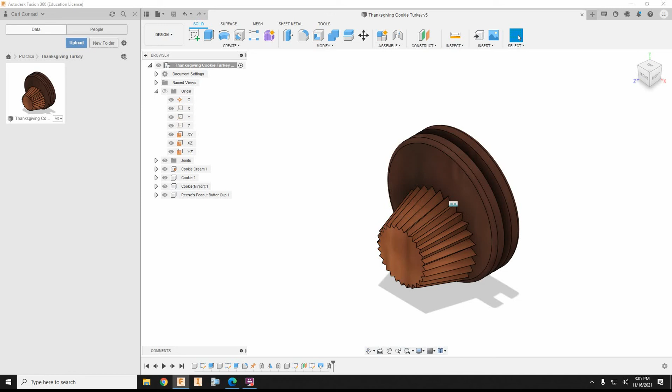Okay, for the Hershey Kiss, of course I want to have my base activated, my assembly file activated, and under Assemble, do New Component again, select Hershey Kiss, and go ahead and say OK.

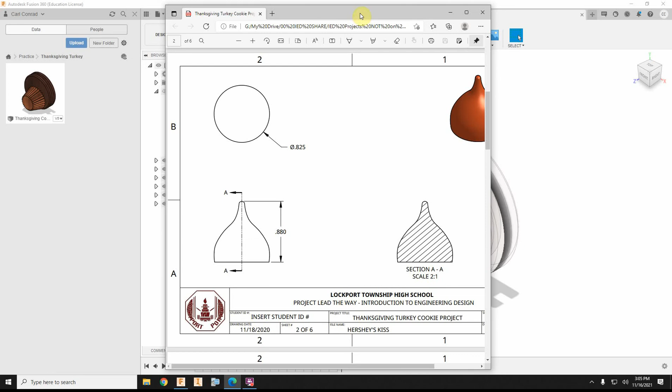If we take a look at what we're going to need to do here, we're going to need to revolve it. We don't have all the dimensions, so we're just going to play around with the spline tool or arc tools and try to come close to that shape. We know the diameter is 0.825 inches, and we know the height. So we're just going to try to come close to that. We won't have all the dimensions, but for the purpose of what we're doing, that's going to be fine.

When I go to sketch this time, I want to make sure I get the origin plane that's right in the middle. I'm going to start off by drawing a center line.

I'm not seeing that edge there, so before I start drawing I need to do a project. I want to project that edge, and I want to project the edge of the cookie and the very top edge of the Reese's cup. That gives me some geometry for where those points are meeting.

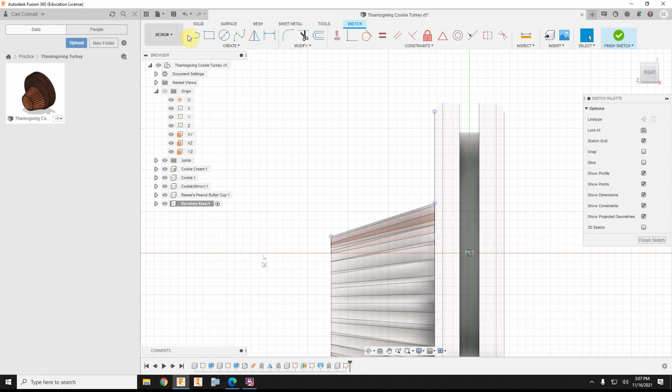Now I'll sketch a center line, because I'm going to want to revolve around this, and the height of the Hershey Kiss is 0.88.

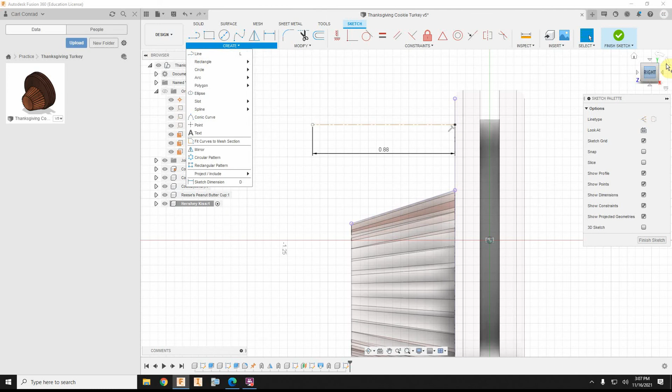Let's just kind of get some arcs here and see if we can approximate what that curve looks like. It might help if we put in a measurement here - this would be the diameter. The diameter of the Hershey Kiss is 0.825. That way we know the Hershey Kiss is going to connect and be right next to the Reese's cup. So I'm going to come in and draw an object line over top of that, and let's start looking at what that's going to look like.

Actually, it looks like it kind of curves down a little bit here. So I just want to get this close - it doesn't have to be perfect.

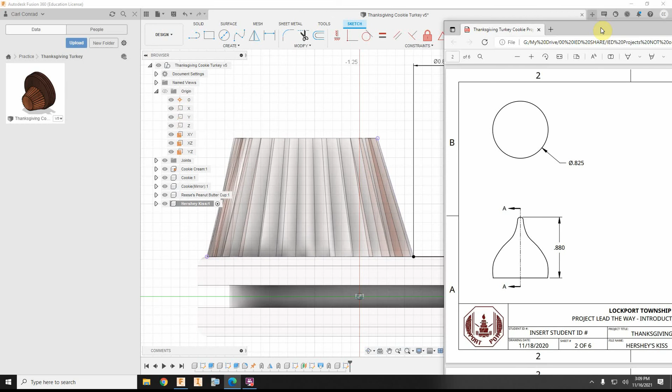For the rest of this shape for the Hershey Kiss, I'm just going to try to eyeball it. It's not going to be real easy to draw, but I'm probably going to use an arc at the top, probably a center point arc, and then a spline tool, which will make a nice little curve. Let's see what that looks like.

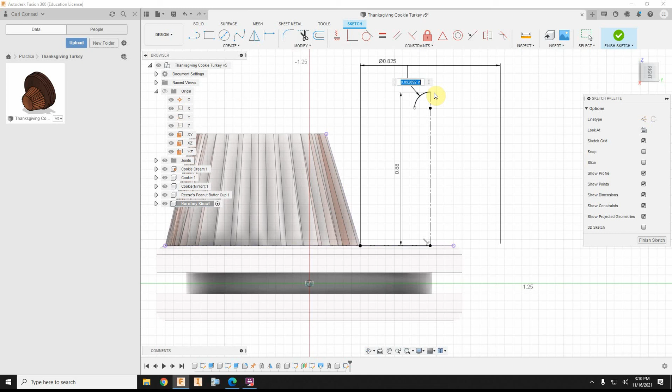Let me go ahead and grab the center point arc tool, and I'm just going to draw part of an arc. It's not fully dimensioned - I don't know if it's important to be dimensioned. Let's go ahead and throw a dimension on that anyway, probably about a 16th of an inch, 0.06 inches, and that looks to be pretty good.

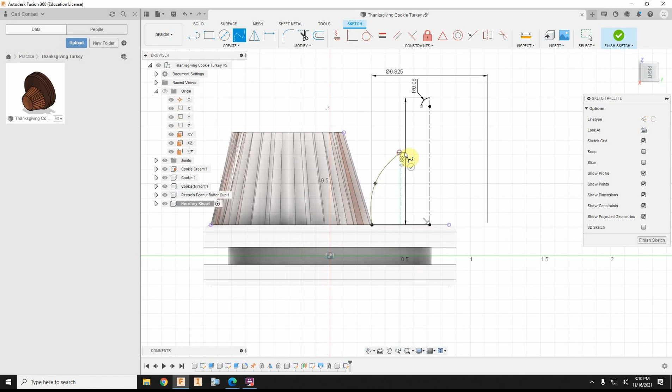Now I'm just going to grab the spline tool, and I haven't done this before, so we'll see how this fits. I'm just going to create some points, kind of thinking about what this shape is going to look like. So maybe I'll come up to about here, and up to here, and up to here. Then a check mark finishes the spline. Actually, that doesn't look too bad.

If I want to make it a little smoother, I could make sure that arc at the top is tangent to the spline, and then if I'm not real happy with the overall shape, I can go in and grab a few of these points and change it around. But I think that looks pretty good.

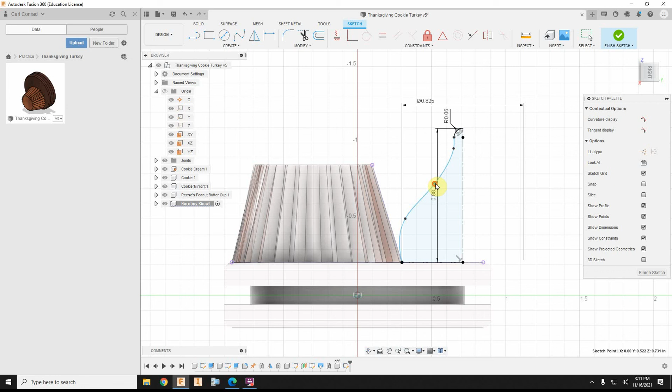So then we'll go ahead and finish the sketch. I'm not worried about it being fully constrained, and we can then revolve - revolve my profile, and we should be able to pick that axis.

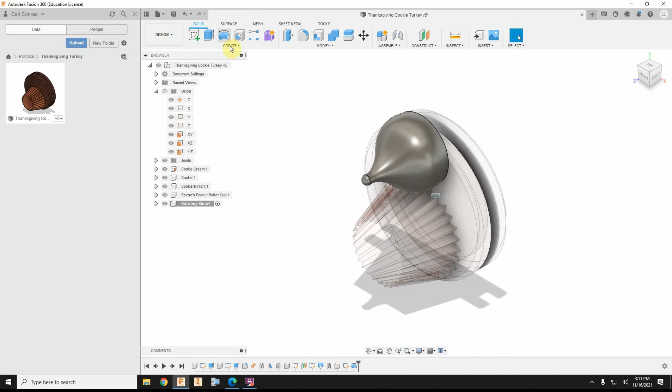And there is the Hershey Kiss. If you activate the whole thing, there's the Hershey Kiss that looks like the face of the turkey. Might want to go back to my Hershey Kiss - looks like that sketch still ended up being visible, so we'll turn the visibility of that off.

There we go. And of course, don't forget to do an as-built joint between the cookie and the Hershey Kiss.